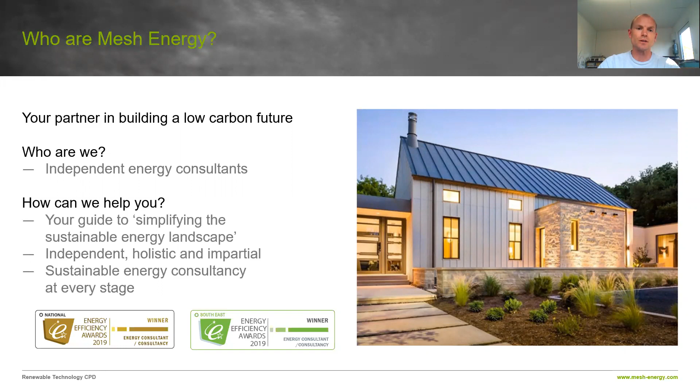So where do we start off? Just a really quick introduction about Mesh Energy. We're independent energy consultants, and put very simply, we partner with architects working on behalf of the clients, completely unbiased. We're interested in the right solution for the client and the building, and have no other commercial pressures. It's a pretty complicated world out there, so we're looking to simplify decision making and give some real teeth behind sustainability. What I mean by that is being able to give numbers and feedback to the design team to really drive the project through to ultimate success. Like a lot of other sustainability consultancies, we can provide support at any stage, whether that's pre-planning advice, post-planning advice, construction, and on to post-occupancy evaluation if need be. But by way of a quick introduction, that's us, and that's what Mesh Energy does, and that's who's behind these webinars.

So by way of introduction, to give a bit of context to RIBA 2030, last year the RIBA declared a climate emergency, much like a lot of other bodies and councils. The RIBA declared this emergency, and I guess that's a stake in the ground, in as much as they realised that something drastically needs to be done as an organisation, and it's a starting point for them to do something and roll this out and make something meaningful happen.

The UK, like the EU, has committed to carbon neutrality by 2050, so essentially making sure that they're not adding any more carbon unnecessarily into the environment, and that's across the board. That seems like a long way off, but it will come around pretty quickly, and there's a huge amount of work to do. The other key thing to note is that net zero operational efficiency, which comes into the RIBA 2030 framework, is very much possible today. So this isn't pie in the sky - this is actually very practically capable. It requires some decent thinking and design to go into it, but nothing that you'll see in the RIBA 2030 framework is unachievable to this very day. I want you to bear that in mind for the remainder of this webinar.

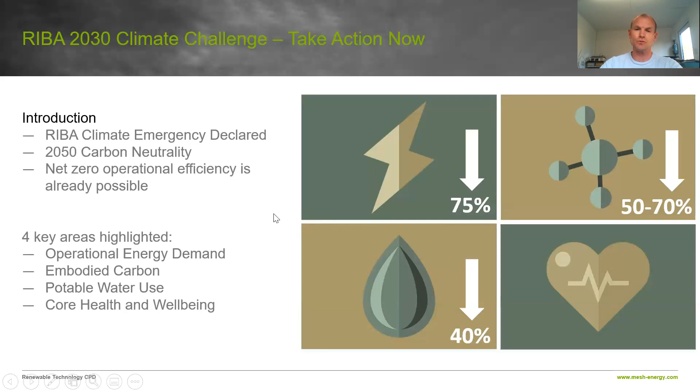The four key areas that this RIBA 2030 document touches on are operational energy demand, embodied carbon, potable water use, and core health and well-being. We'll go into those in detail, but this first section is about covering the document. The arrows on the little quadrants in the top left-hand icon show a 75% reduction - that's showing you for operational energy demand, we're looking at a 75% reduction on current standards. Embodied carbon, the top right emblem, shows a 50 to 70% reduction - that's what is being requested, depending on whether you're domestic or commercial. Potable water usage, the bottom left-hand icon, they're looking at reducing by 40% over the next decade. And core health and well-being - this is a new one, and we'll go into this in more detail. This is really just making it a key part of design, and there's no such reductions as such - it's including it in the framework and introducing it.

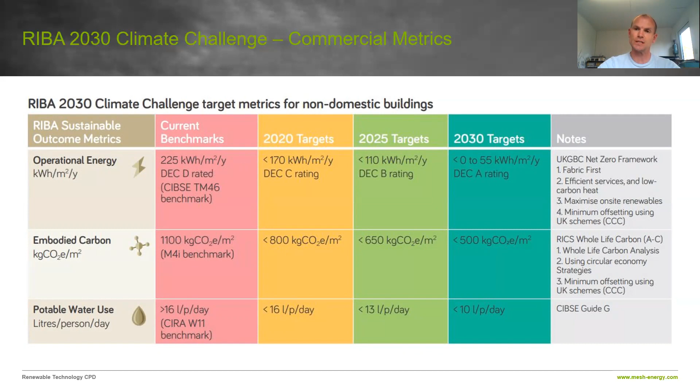Non-domestic buildings, the numbers are slightly different, but essentially the framework is the same. I'm not going to go into mega detail here. The numbers are actually bigger compared to the domestic figures, certainly for operational energy and embodied carbon. Potable water usage actually is down, so this is more suitable for residential buildings and things that have a higher density of people in them.

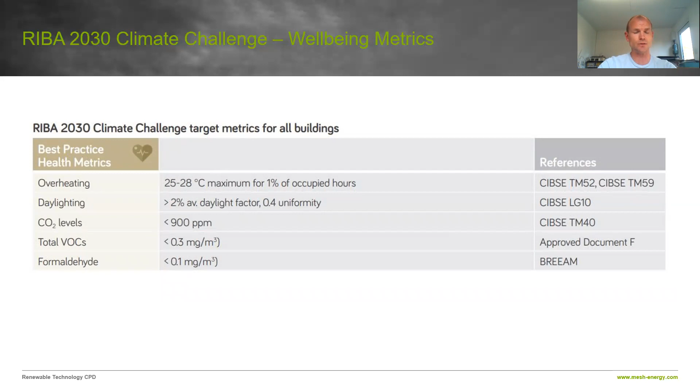Then you've got VOCs, volatile organic compounds, below a certain threshold, and formaldehyde. Now these are going to be really tricky to analyse, if not impossible. Essentially I guess you could measure them at the post-occupancy evaluation stage, but they're in there for completeness. Really it's the top 2 or 3, and I'd say specifically overheating, that needs particular attention going forward practically.

So that's a really quick whistle-stop tour of the RIBA 2030 framework. It's quite a simple document actually - very impressed by how simple the document is. Usually these things can run onto pages and pages.

But hopefully what is most meaningful for everybody listening in is an interpretation of the practical steps. I think this takes the bulk of the thinking - how you turn something from a paper document into something you deliver on site and can properly inform the design process. So we'll go into more explanation of the particular areas here, and again, our take, Mesh Energy's take, my take on what a building looks like to achieve these targets.

So to start with, let's start with operational energy demand. And the definition for this - this is really clear here - to be crystal clear about the numbers involved, to make sure we're fully capturing this.

Operational energy is split into two parts: regulated and unregulated components. Regulated components are the things needed to keep the building warm, properly ventilated, and functioning, almost whether there were people in it or not. There's lighting involved too. So core heating, cooling, hot water, fans, pumps, lighting that keep a building running normally. The unregulated part is actually use specific.

For a house you may have certain devices, for a laboratory other devices, for a manufacturing facility other devices again, and those are very use specific - this is the unregulated part. So there's a baseline bit and then a piece on top which, depending on what the building's used for, increases or decreases. This is the definition of operational energy. You need to think of both of these things and factor them into the RIBA framework numbers.

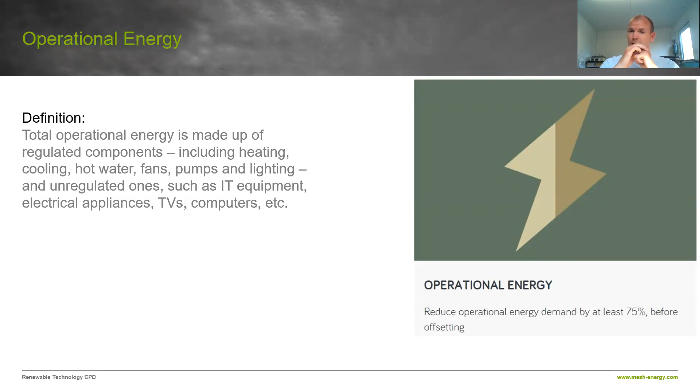So what I've decided to do, rather than doing domestic and commercial here, we've just focused on domestic for the sake of this webinar and looking at the practical implications here.

This is really how we see the profile of buildings as these targets get tighter. So we've looked at the U values here for the main fabric elements, air tightness, heating and hot water technologies, ventilation technologies, and then on-site energy generation - first and foremost solar panels effectively, and potentially battery storage.

So where we are today: run-of-the-mill, nominal building regulations U values, a decent gas boiler, mechanical ventilation that we'll all be familiar with, and no on-site energy generation. You could meet the 146 kilowatt hours per square meter per year just by using the nominal U values for a home.

When we look at the 2020 target, which is where we are today, the U values have tightened up slightly, not massively - we're talking about just over a 10% improvement for the main bits, and windows again getting 10-15% better, still in double glazing territory.

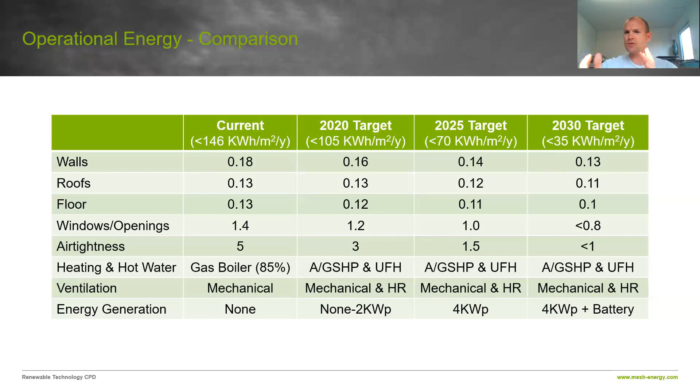As I say, these are just our ideas, and we think they will get you pretty close. We've been involved in projects that have hit these 2030 targets, so I can tell you with a fair amount of confidence that they will get there if you base your designs on this. But this just gives you a flavour - it gives you an idea of how much change is involved practically for a building.

So embodied carbon, this is an interesting one for many people, other than for a very few specialists. It's been floating around for a while, and I've got to be honest, for me and for Mesh Energy, this is out of these four quadrants for the RIBA 2030 framework.

This was the biggest unknown for us, and very tricky. Where do you start, where do you stop? What is clear from the RIBA 2030 framework is it's reasonably all-inclusive - essentially its whole life cycle carbon analysis. The definition for embodied carbon here really is the carbon footprint of the material. It considers how many greenhouse gases are released through the supply chain, including everything from extraction of materials through transport, refining, processing, assembly, as well as the end of life profile - maintenance and replacement through the building, but also recycling, demolition, all that kind of stuff. So really it's cradle to grave, as they say, as far as the embodied carbon for every single element of the building. And for a lot of people, that just immediately is a massive headache.

There's lots of numbers - where do you find reliable information? It's been made a lot easier recently to do that with software and various tools at our disposal. So don't despair. This is getting a lot simpler and a lot more available.

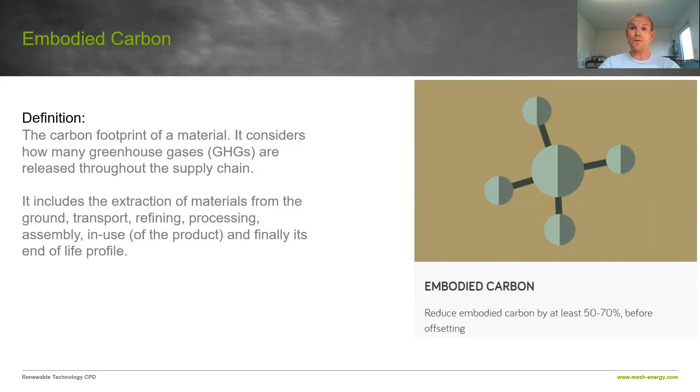Embodied carbon, as I say, over the next decade, this is looking to decrease anything by 50 to 70%. But if we understand what that is today, I think most of us may be surprised how far we've actually got - but most of us don't know what those numbers are at all.

So this focuses us in on that particular area - embodied carbon, areas to improve. Again, there's a particular focus here on retrofitting buildings rather than building new things. Of course, buildings that exist save a lot of carbon because those materials are already on site, and save a lot of energy. There's a lot of focus here on fundamental circular economy principles, like recycling, sourcing local materials, and minimizing residual waste to an absolute minimum, and reusing materials wherever possible.

Also in the RIBA 2030 document, there is a touch on offsetting emissions by offsite renewable energy projects or woodland planting. I think this really does factor in more on the commercial side rather than domestic, but it is in there as a legitimate way, if you can't quite get to targets, by essentially buying credits or offsetting carbon by other means.

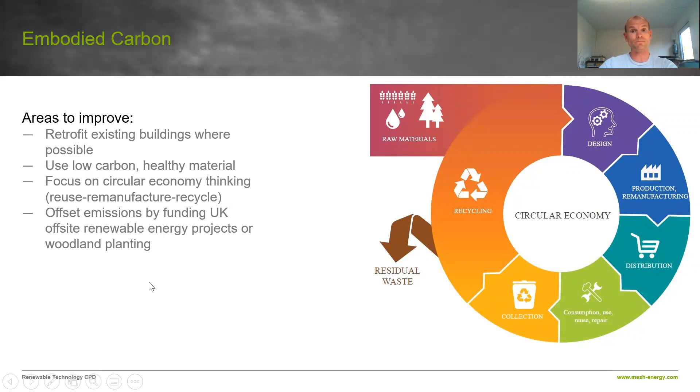This is a really interesting graphic actually - I say we don't need to worry particularly about the mega detail here, but it gives you an idea of trends, and this is from CIBSE documentation. It gives you office, warehouse, and residential here, and it's a breakdown of where embodied carbon factors in, and what proportions there are for embodied carbon - when essentially the keys are handed over for the building, to actually build it and get to practical completion - and the proportions involved in actually running the building, as well as replacement through the life of the building.

So to give you an idea here, if you look at the residential one, the dark orange or the deeper orange is about embodied emissions up to practical completion. So before somebody's walked through the door, you've essentially got 51%, so half of the embodied carbon in that building, whether it's used or not. However it's used, over the next 100 years, half of that carbon is in the building by the time you hand over the keys. The lighter orange bit there, 18% in this particular case, is about replacement - over 80 years, 100 years, how much carbon is in those bits that you replace and renew. And the dark grey and light grey there are this kind of regulated and unregulated operational carbon emissions - so heating it, lighting it, energy, electricity for ventilating it.

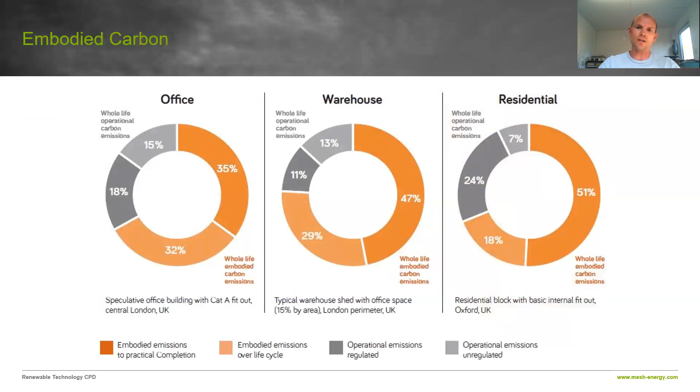This particular slide shows you the typical buckets here. So you've got these various stages: the product stage, which is A1 to A3, construction, use, end of life, and then benefits, loads, demolition, recovery, recycling potential.

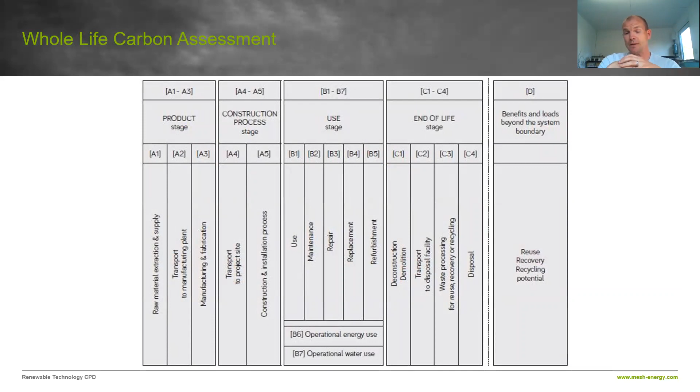When we're looking at embodied carbon, it's one thing having a look at what the total figure might be, but what's really interesting is different materials will have different profiles depending on where they're sourced, how much processing is involved from raw materials, as well as turning it into, say, super duper insulation material, and how easy it is to recycle. Focusing on this section will really lift the lid on the profiles of these materials and focus our minds on, and maybe even surprise us at, how much embodied carbon there is at these different phases. Once we understand how these things are profiled, we can get better.

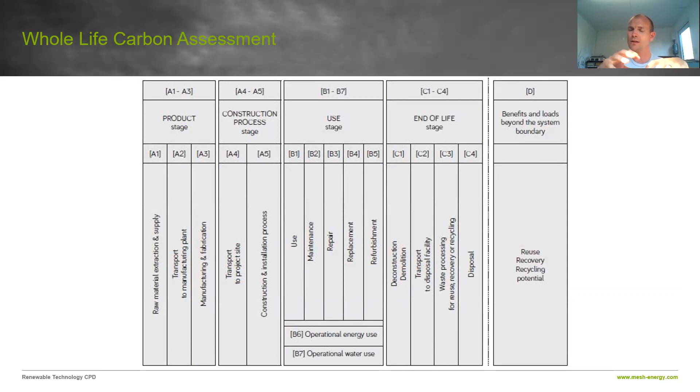The key to the whole embodied carbon piece here is increasingly these environmental product declarations, or EPDs, another three-letter acronym we all love. For an increasing amount of products, these are third-party verified certificates that can be relied upon to tell us what the embodied carbon is of a particular product, whether that's PIR insulation, a clay tile, a building brick, or an RSJ for construction of a building. These have been verified, and they tell us in detail for the various chunks of the process what the embodied carbon is. This saves us, because they're verified, they come from different sources, but they're verified in the same way, and essentially normalized. This allows us as design professionals to draw on this data, manipulate it, compare it against our designs, and save ourselves a whole load of headache, giving us really reliable feedback. So environmental product declarations are our kind of savior when it comes to this, and there are over 8,000 currently.

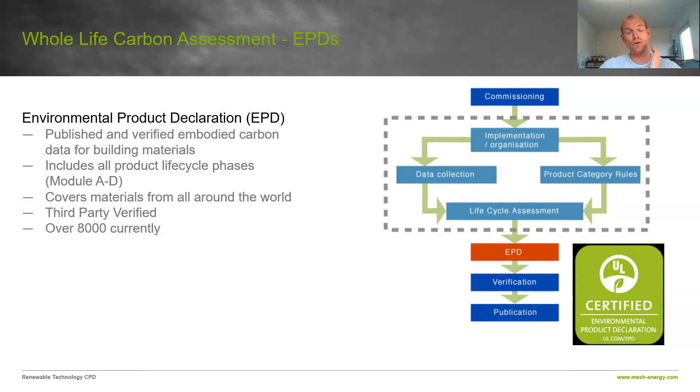There's quite a few to pick from. Products sourced globally, that's all factored in as well. And this is actually a UK-based thing, so we haven't had to make any fudges to make it make sense for the UK market. These all factor in transport from overseas or Europe, or wherever it is. So very, very reliable information, and there are thousands of products to choose from.

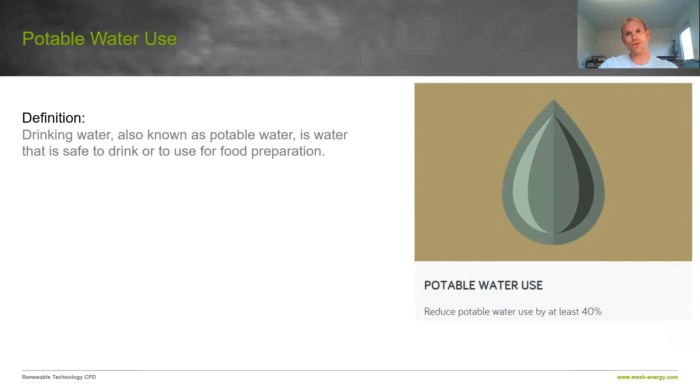Potable water usage, the definition here for the third section of the RIBA 2030 framework, is around potable water. This is a very simple definition: drinking water, or stuff that's safe to drink or use for food preparation. Pretty basic. The idea is that we try and reduce usage over the next decade by about 40% from where we are today. Again, what we've tried to do here is give you an idea of practically how you would deliver this, based on the technology and calculations we've got.

Potable water usage factors into Part G of the building regulations. Typically speaking, most planners at the moment are asking for proof that we hit the 2020 target, which is actually less than 110 litres per person per day. So most of us are already there, and that can be achieved by dual flush toilets, low flow restrictors on showers and things like that. Solutions we'll already be familiar with, and unless we've got particularly luxurious baths, it's very easy to achieve.

The 2025 targets and the 2030 targets, although it doesn't appear to be a massive reduction, are actually surprisingly tricky. So you're into rainwater harvesting territory.

When you look at less than 95 litres per day, and potentially some quite advanced greywater harvesting techniques to get less than 75 litres per day.

It's predicted, our educated guess, that as toilet technology moves on - and that's where a lot of potable water usage comes in of a day, toilet use in a home and certainly a domestic building - advances in that kind of technology and shower technology will help us get to these lower targets as the decade progresses, without having to invest in cumbersome and quite costly greywater harvesting technology, and potentially rainwater harvesting technology. So this is today, but we will see advances here which will hopefully allow us to keep costs under control and still meet these targets.

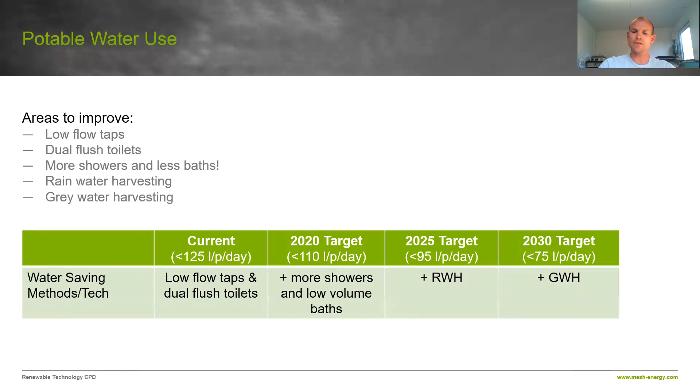And then finally in the RIBA framework here, we've got health and well-being. Now this is a new section, and the way that this is defined, as well as the way health and well-being is defined by the WHO, is a state of complete physical, mental, and social well-being, and not merely the absence of disease or infirmity, which is good to know. And well-being specifically refers to a positive rather than a neutral state, framing health as a positive aspiration. Hand on heart, I think we want to live like that, and it surprises people that that has to even be defined or focused on.

But I think as technology has rapidly progressed and buildings have progressed, some of the side effects of rapid advancement have meant that certain aspects of health and well-being have not knowingly or intentionally, but they have been left behind. I'll go into that in a bit more detail.

There's certainly a growing pressure from clients, through press and media and stuff. Air quality, as we sit here today, is very, very top of the list. So this is a really critical chunk of the framework, and I'm really pleased that this has been included. There's been some sensible figures put against it as well, so that we can design better buildings and then measure against those once the buildings are occupied.

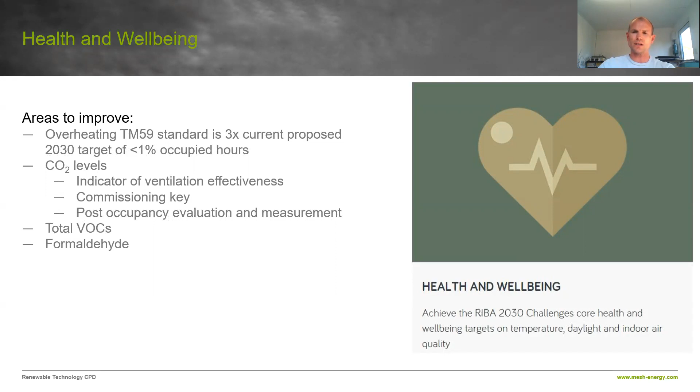VOCs and formaldehyde - when you talk about total VOCs in this context, you're really talking about more responsible paints and coatings for things, man-made materials, particularly trying to alter the chemistry in those so there are less organic compounds, which more and more people are becoming sensitive to. And formaldehyde really is talking about glues and adhesives and things like that - we see very high formaldehyde concentrations. So, really, really difficult to design into a building, but it does focus our mind on more responsible purchasing of products and understanding where those come from and the characteristics of those.

And the final chunk of the webinar here, which I think is really important to understand. As I said at the start, all of this stuff is not pie in the sky, this is achievable. What's really important is for me to try and explain what tools are available today to deliver, for you to understand where you are against these targets.

It's one thing knowing where you sit, it's another thing improving, or knowing how much you have to improve. Money always talks, so there's no point throwing bags of money at this stuff if it's unnecessary, but it is worth focusing on and finding out if design improvement, or in some cases drastic design improvement, is required. So this last bit is just on tools and assistance that can be provided.

So this was the best way here that I could show what I'm talking about and how you can deliver against these different pieces of the RIBA 2030 framework. Mesh Energy delivers a whole load of services for architects and design professionals, and for many years we've been designing our own software and in-house calculators. Real bread and butter for us is feasibility, technology strategy, helping people with capital costs and renewable heat incentive, government subsidies for putting in sustainable technology. And those are standalone reports.

As part of that, out drops what we think running costs are, and so what we think some of the operational energy characteristics are of the building if it's built as designed. Part G water calculations at the very bottom there comes from building regulations and is directly what you would use to figure out what your potable water usage is. It's a pretty standard calculation, nothing fancy there.

But there are elements of operational energy usage, embodied carbon and cost, and health and well-being, which are really gaping holes at the moment in both our offering as well as tools that can be used to help you guys out as architects and design professionals.

And the way in which we meet this is by making thermal modeling the keystone to early stage design, and then building on that using modules that are readily available, accessible today. We've got this technology in place, and using those modules very effectively as part of the early stage and developing design process.

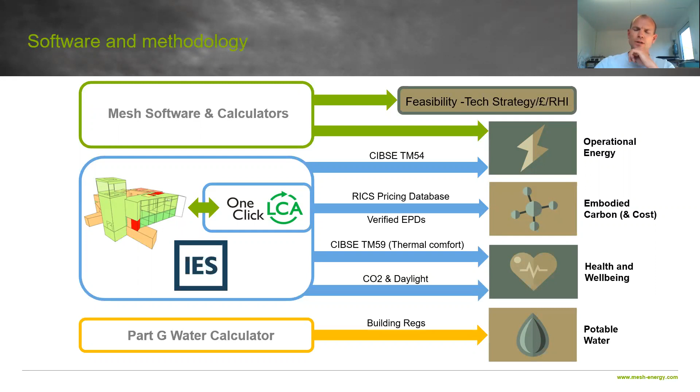And this is really exciting looking at it this way, because I think this RIBA 2030 document has acted as a real catalyst for improving the design standards, elevating all of us to a new level, and getting us thinking as a consultancy about how we can deliver that for a sensible cost and deliver much better value to you guys as architects as well as clients.

And so I thought of another graphic as well, which kind of helps you look at the stages here. Again, we're not going to go into mega detail, but this gives you an idea based on the stages.

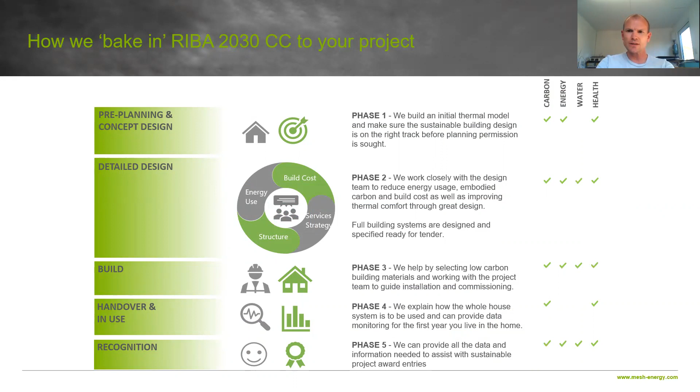On the far right-hand side here, we've got various tick boxes, which is essentially where you ping the various modules of the RIBA 2030 framework. Using thermal modeling, we're talking about getting involved at a very early pre-planning and concept design stage, so this would be very much a close working relationship with you guys as architects.

It's up to you whether you pass this kind of cost on to the client at this stage, but what is becoming obvious is there's the opportunity for R&D tax credits at this early stage. If we work business to business, there's an opportunity to make a saving against corporation tax at the end of the next financial year.

As the project goes through planning, you get into detailed design. You've done all the hard work with the thermal modeling, you've got some idea about embodied carbon, and really the detailed design process can get off to a flying start, and you've got some real teeth there. It doesn't have to cost a ton of money to get this stuff done, but it gives some amazing tools at your disposal to get through this process very robustly and very intelligently.

Then into the build phase, because you've used these EPDs and you've got this software, the house is already designed, it can help you even further refine the best materials to low carbon materials to make the building from, right up into the last minute. And then handover in use, you're into monitoring and measuring against the RIBA 2030 framework.

And of course, one thing that hasn't been mentioned so far, and maybe some of you are already aware, but without following this RIBA 2030 framework, without putting numbers against this framework, really you're dead in the water when it comes to awards, certainly RIBA awards going forward. So if you want to remain a progressive practice that is award winning, that wants to win RIBA awards, which are very highly sought, you need this information.

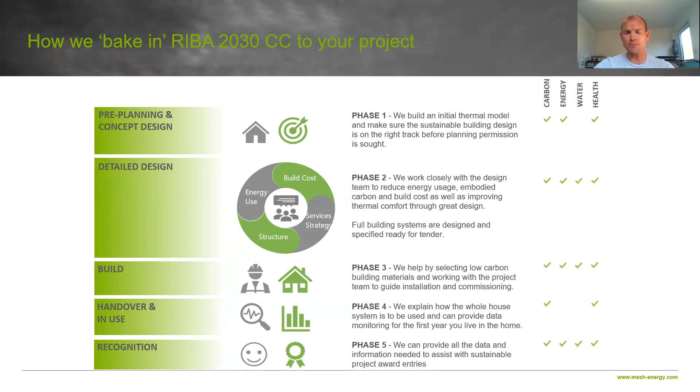Based on feedback from other architects, this is forming about 60% of the application process. And if you've gone through this as a standard part of the design process, those numbers just fall out at the end, so it becomes very easy to make those applications when you're going for awards.

And when we look at benefits here, again, they're numerous. You're looking at just greater levels of confidence in the building geometry before you go in for planning. If something does need to change, you know about it. You haven't got to go in again for planning if you realise there's something been picked up by detailed design, particularly when it comes to overheating.

So, the overuse of glazing, or maybe you've gone under on overhangs, or those kinds of things, building furniture on the outside that would affect the planning process - find that out before you go into planning, and that's the real gold dust at that stage. But again, through detailed design, you're talking about reducing running costs, unnecessary capital expenditure, clear and easier contractor negotiations and a whole raft of other benefits.

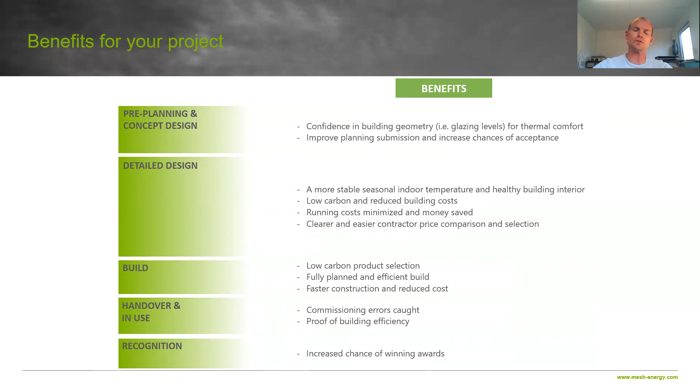I'm not going to go through every single one, you can obviously pause here and have a look at these in detail. So we're really excited about the RIBA framework, and we think it's eminently deliverable today. This isn't pie in the sky stuff.